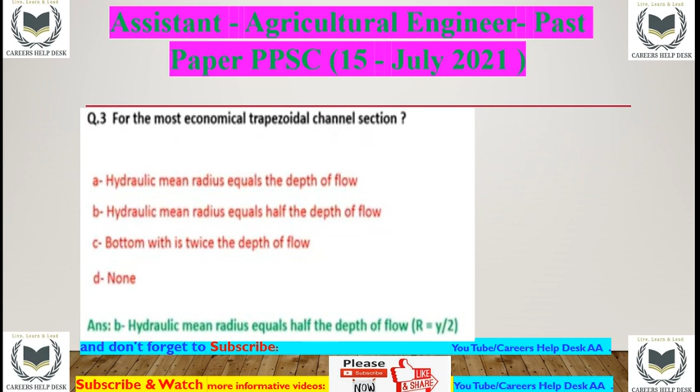Question number 3: for the most economical trapezoidal channel section, A) hydraulic mean radius equal to depth of flow, B) hydraulic mean radius equal to half the depth of flow, C) bottom width is twice the depth of flow, D) none of this। इसका आंसर है B, that is hydraulic mean radius equal to half of the depth of flow, R is equal to Y/2।

Now question number 4: a triangular section is hydraulically efficient when the vertex angle is, A) 90 degree, B) 60 degree, C) 30 degree, D) none of these। Answer is A, 90 degree angle formed by two equal sides like isosceles triangle। Detail is efficient hydraulic section: section factor A R raise power 2/3 is maximum, then R is hydraulic radius equal to A/P, area over perimeter। Next, triangular section sides inclined by 45 degree right angles। In rectangular section, flow depth y is equal to B/2, B is the channel width। Trapezoidal section के अंदर top B is equal to 2 multiply length of the side slope, R is equal to Y/2।

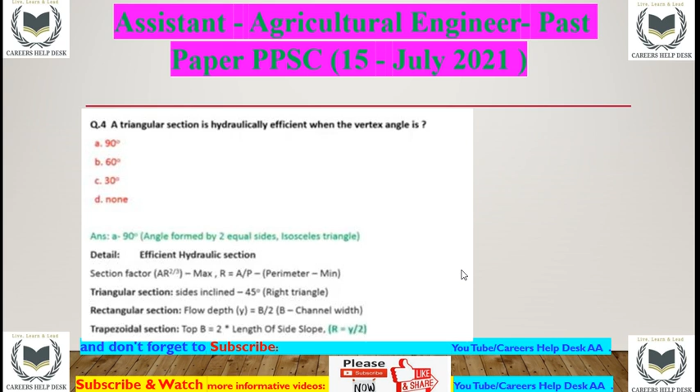Next question number 5: in whole circle bearing system the local attraction will be considered। A) if the difference between FB and BB will be equal to 180 degree, FB is forward bearing and BB is back bearing। B) if the difference between FB and BB will not be equal to 180 degree। C) if difference between forebearing and back bearing will be equal।

D) none of these। Answer B is correct - if the difference between forebearing and back bearing will not be equal to 180 degree।

Detail is that back bearing minus forebearing is equal to 180 degree when free from local attraction। That is free from local attraction, if not equal to 180 degree, it will require local attraction in this option।

In quadrantal bearing, a line is free from local attraction if forebearing is equal to back bearing। This option will apply in quadrantal bearing।

And this option is whole circle bearing। Whole circle bearing में local attraction considered की जाती है जब 180 डिग्री के इक्वल नहीं होता।

क्वाड्रेंटल बेयरिंग के अंदर लोकल अट्रैक्शन इज फ्री फ्रॉम लोकल अट्रैक्शन इफ फोरबेयरिंग एंड बैकबेयरिंग with opposite quadrants।

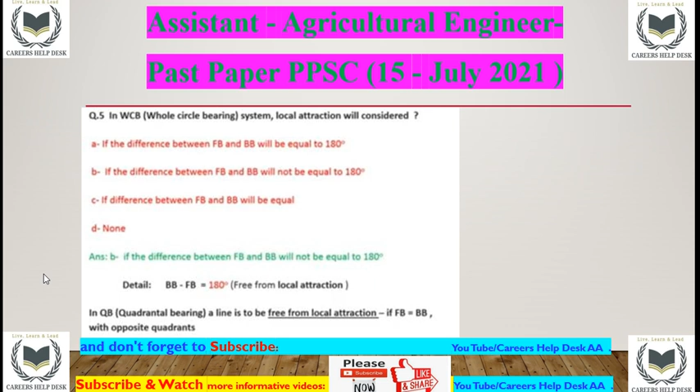Next question is question number 6: the diagonal scale is used to read। A) 1 unit, B) 2 consecutive unit, C) consecutive 3 consecutive unit, D) none of these। Answer will be C, 3 consecutive unit। For the diagonal scale, while the plain scale 2 consecutive units are required।

Next question number is question number 7।

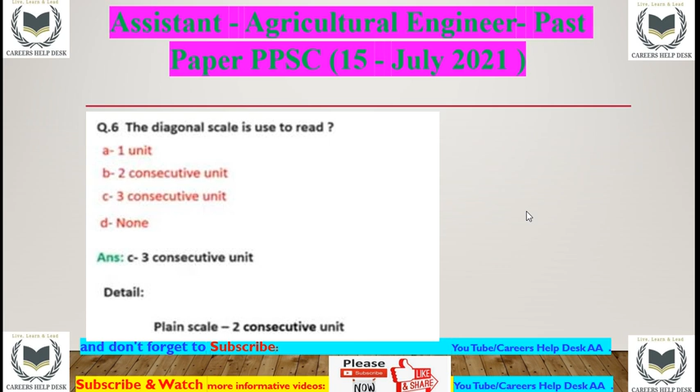Desiccation of clay during construction results in cracks. Option A is reduce the efficiency, B is increase the efficiency, C is has no effect on liner efficiency, D is none of these. The correct answer is A, reduce the efficiency, as desiccation of clay during construction causes cracks.

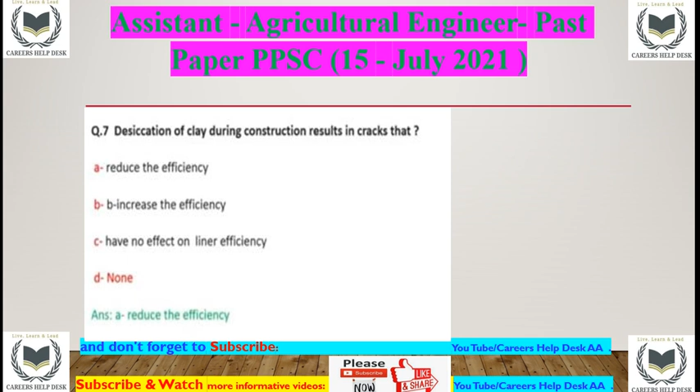Question number 8: Flywheel of the engine is made up of? A is cast iron, B is cast steel, C is aluminium, D is none of these. The answer is cast iron. Flywheel is made up of cast iron, and sometimes cylinder blocks are also made of cast iron.

Question number 9: In seed drill planter, the frame is made up of MS flat, cast iron, carbon steel, or none of these. The answer is MS flat. Detail: the frame of seed drill is made up of angle iron, while the planter drill is made up of MS flat.

Question number 11: Ridge planting is generally used in areas of low rainfall, high rainfall, low temperature, or none of these. The answer is high rainfall. If furrow planting is used, then the answer will be for semi-arid areas, since furrow planting is used in semi-arid areas.

Details: Ridge lines are formed along the highest points, and irrigation canals are aligned along them. Furrow planting is used for semi-arid areas.

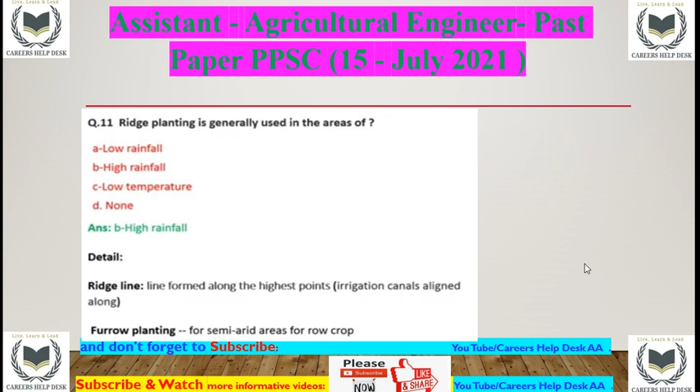Question number 12: A ridge canal is also called a watershed canal, contour canal, side slope canal, or none of these. The answer is watershed canal, because watershed canal irrigates on both sides. Detail on option B: contour canal frequently encounters cross drainage work parallel to the ridge canal and irrigates only one side, whereas watershed canal irrigates on both sides.

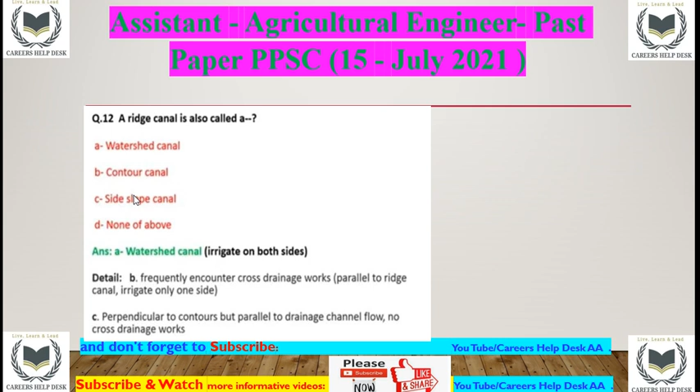Contour canal irrigates only one side, while the side slope canal is perpendicular to contours but parallel to drainage flow, with no cross drainage work required in side slope canals.

Question number 13: Low river training implies river training for A: high flood, B: medium flood, C: low floods, D: none of these. The answer is C, low floods.

High river training implies river training for high flood. What is river training? River training refers to the structural measures taken to improve a river and its banks, used to control floods. River training was commonly used to control floods.

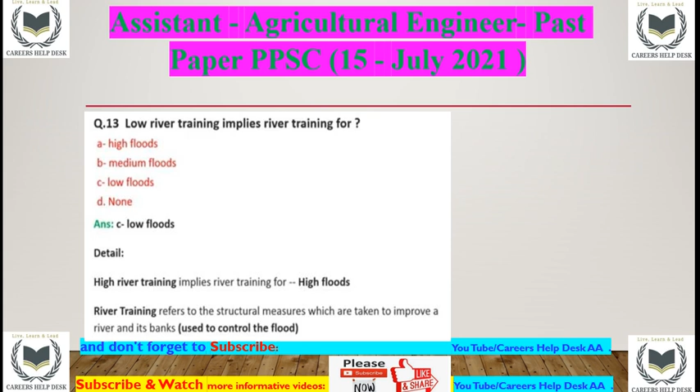Question 14: Lining of canals is required when A: water table is above FSL of the canal, B: water table is below the FSL of canal, C: there is a natural impervious stratum below the bed, D: none of above. The answer is D, none of above.

Lining is used to prevent seepage losses. Even lining is done for the canal and water course purposes to decrease the seepage losses.

Question 15: Paints are used as A: coating material, B: preservatives, C: water resistant, D: none of these. The answer is B, preservatives.

Question number 16: Biogas can be produced by A: farmyard manure, B: crop residue, C: kitchen waste, D: all of the above. The answer is all of the above. Biogas is produced by anaerobic digestion, in the absence of oxygen.

Question number 17: Which implement maintains row to row and plant to plant distance? Options given are planter, seed drill, transplanter, and none of these. The answer is planter.

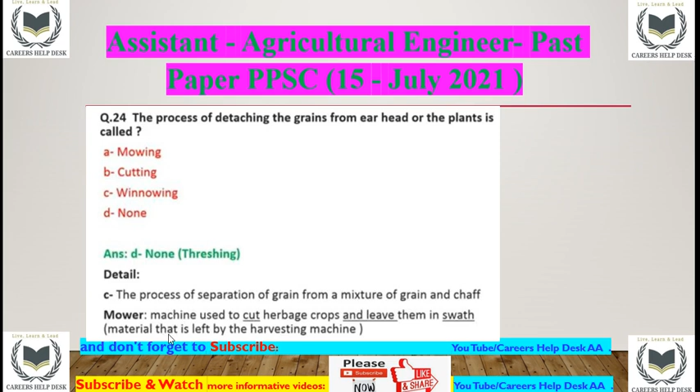Apart from that, option A is mower, a machine used to cut herbage crops and leave them in swath. Swath is the dead material that is left by the harvesting machine.

Next question number 25. In a tractor, the PTO was introduced during: A) 1915 to 1924, 1935 to 1944, C) 1890 to 1910, D) none of these. Answer will be 1915 to 1924. This is given because the First World War was between 1914 to 1918, and the Second World War was between 1939 to 1945.

Next question is 26. The subsoiler is operated by the tractor at which horsepower? A) 35 horsepower, B) 50 horsepower, C) 25 to 35 horsepower, D) none of these. Answer will be none of these, because the power required to operate the subsoiler is 60 to 80 horsepower. Details: subsoiler is a primary tillage implement, depth of plough is 100 centimeter, size of engine used to operate a self-propelled type combine is 60 to 150 horsepower, while 60 to 80 horsepower is required for subsoiler.

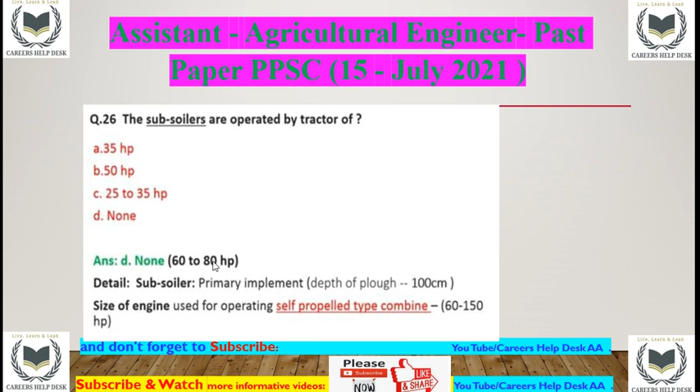Next question is 27. Quality of fuel is judged by its: A) calorific value, B) power conversion, C) consumption, D) none of these. Answer will be calorific value.

Next question is 28. The hydraulic jump that develops usually in barrages and canal head regulators is a type of: A) strong jump, B) steady jump, C) oscillating and weak jump, D) none of these. Answer will be C, oscillating and weak jump.

Details are given as below. The nature and strength of the jump depends upon the Froude number. Froude number is greater than 1 on the upstream side of the barrage, where flow is supercritical. On the downside of the hydraulic jump, flow is called subcritical flow, where Froude number is less than 1.

What is hydraulic jump? Hydraulic jump dissipates the energy and changes the supercritical flow to subcritical flow.

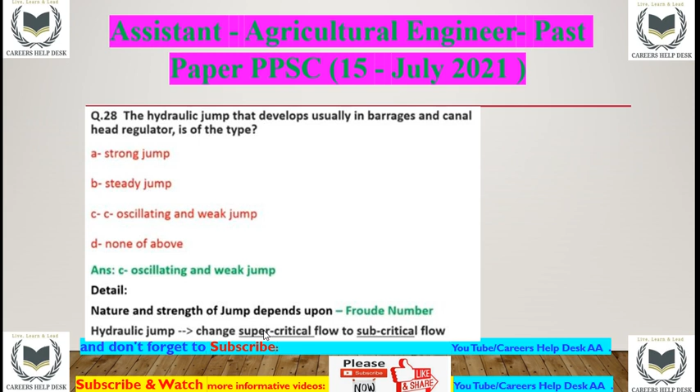Next question is 29. The actual area covered by the implement during its total consumed time is known as: A) effective field capacity, B) field efficiency, C) theoretical field efficiency, D) none of these. Answer will be effective field capacity.

Now the details are given below. Theoretical field capacity is the rate at which a machine would do work at full rated width, for 100% of the time, in acres or hectares per hour. What is field efficiency? Field efficiency is the ratio of effective field capacity and theoretical field capacity. This is the difference between these terms.

Next question is 30. Effective field capacity C of farm implements is given below. A) C is equal to SWE over 1000, B) C is equal to SW over 100, C) C is equal to SW over 10,000, D) none of these. Answer will be A, C is equal to SWE over 1000.

Effective field capacity is equal to SWE over 1000, where S is equal to speed in kilometer per hour, W is width of the implement in meter, and E is equal to efficiency in percentage. This formula is used to calculate the effective field capacity.